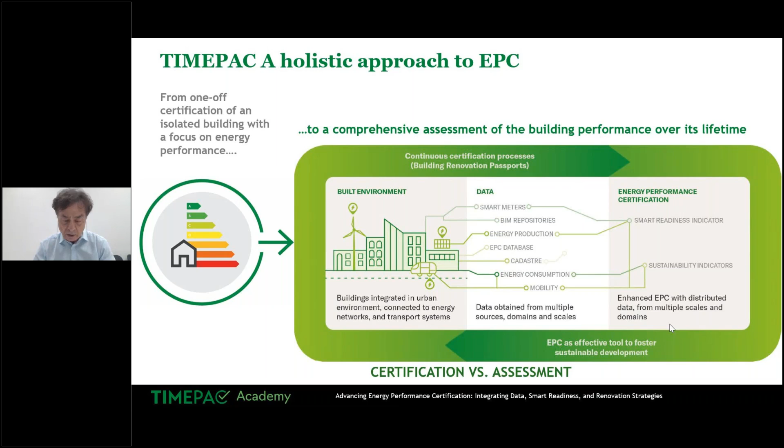For us, for TIMEPAC, the certification process is not just a one-time task. It's a continuous data management cycle that flows through 4 main stages: generating, storing, analyzing, and using certification data. This cycle is not static. It continues throughout the entire lifetime of the building, and this continuity allows us to assess and improve a building's performance over time.

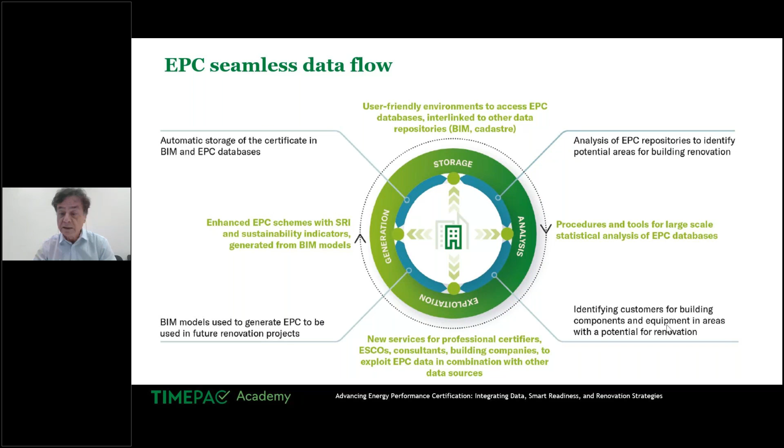However, each one of these stages brings its own challenges. In the generation phase, for example, we still have quality and reliability issues, which the recent EPBD is trying to address. In the storage phase, not all European regions and countries have comprehensive EPC databases. And even when these databases exist, turning this data into targeted recommendations is still difficult. Finally, analyzing this data and exploiting the knowledge to create services for improving the building stock is essential, but there are still questions about which actors and which services can be provided from the analysis of these EPC databases.

Data integration is therefore a key issue in the latest EPBD. For example, the EPBD highlights the importance of connecting national databases to EPC databases and also to the European Building Stock Observatory. EPC databases can also be related to renovation passports to track the renovation stages over time. To implement all of this connectivity between all of these components presents both technical and also local implementation challenges, which will need to be addressed in the coming years.

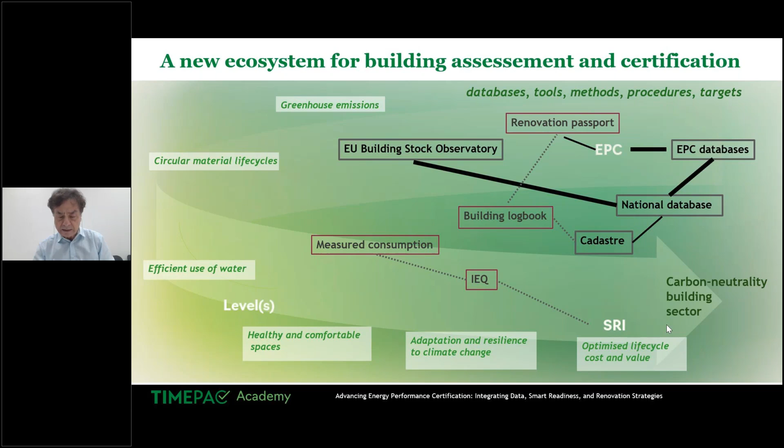Moreover, after the latest revision of the EPBD, EPCs have become part of a broader ecosystem, as we can see here in this diagram, which includes the Smart Readiness Indicator and also the levels framework. The integration of EPC with these certification schemes is also a challenge for the future development of building certification.

In the first year of TIMEPAC, we analyzed certification methods across 6 partner countries. Following this initial study, we started to envision potential scenarios to enhance current certification processes. Our focus was not on creating new tools, but on exploring diverse scenarios to inspire ideas and collect insights.

In particular, we consider these 5 scenarios: the integration of BIM with EPCs, this is the first one. The second one, EPCs enhanced with operational data. The third one, building renovation passport integration with EPC databases. Smart readiness and sustainability integration with EPC, and quality control of EPC databases for large-scale renovation.

These 5 transversal deployment scenarios were conducted simultaneously across the 6 countries, allowing us to consider building certification at the European level. After developing these scenarios, we validated our findings through workshops with stakeholders to ensure that our proposals were aligned with real-world needs. And finally, we concentrated on knowledge transfer through training activities, which is a key component of the TIMEPAC project.

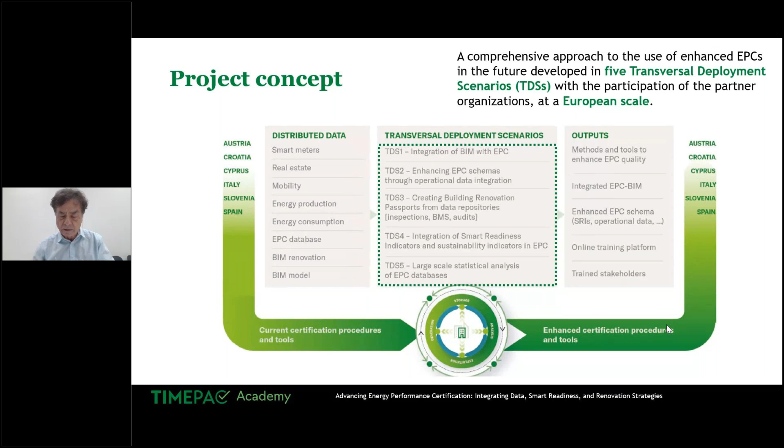Through the TIMEPAC Academy, we share these insights with professionals, building skills and fostering a deeper understanding of innovative certification approaches. I will provide now a brief overview of the key insights from each of the 5 scenarios, and a more detailed explanation will follow later in the next sections of this webinar.

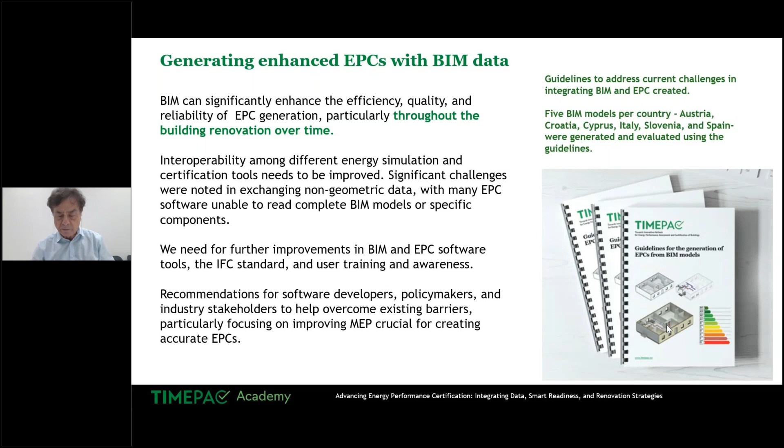The first one, integration of BIM with EPCs. In this scenario, we explore the integration of BIM with EPCs to enhance data certification. We created for this purpose 30 BIM models across the 6 countries and applied existing certification tools, identified the gaps, and developed guidelines.

The second scenario, enhance EPCs with operational data. Here we focus on adding real-time operational data to EPCs to improve their accuracy. New indicators for energy efficiency, for indoor environmental quality, and for building performance impact were introduced.

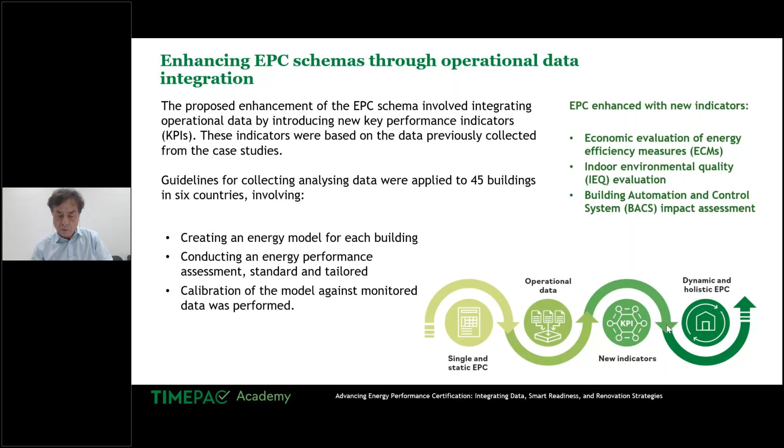In the third scenario, building renovation passport integration with EPCs, we examine how to incorporate the renovation passport into certification databases, creating a dynamic record of building improvements over time.

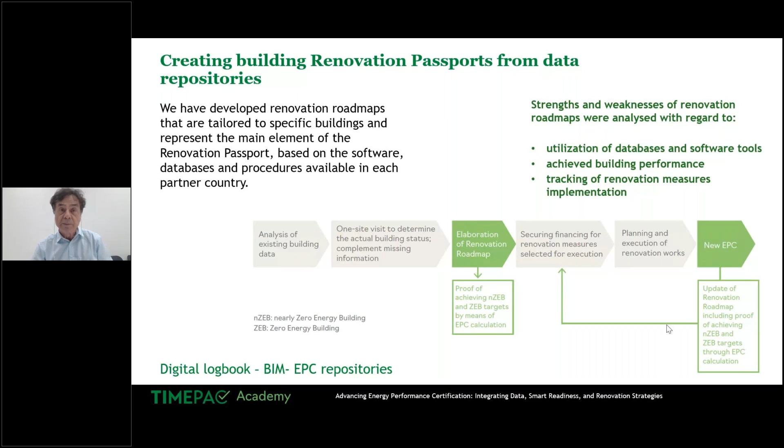For smart readiness and sustainability integration with EPC, we participated in pilot tests for the SRI, aligning EPCs with SRI metrics. And we created the TIMEPAC Code of Conduct for smart readiness and sustainability ratings, which is available on our website.

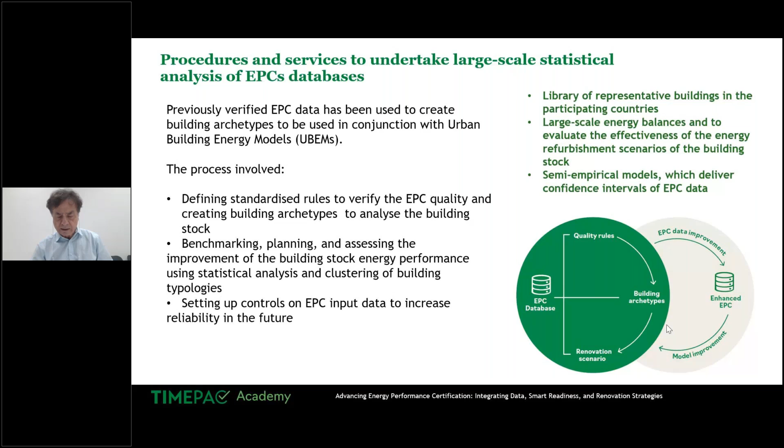And finally, for the procedures and services to undertake large-scale statistical analysis, we assess the quality of the EPC databases in the partner countries to identify inconsistencies. And in this scenario, we could develop archetypes for energy simulations, identifying renovation opportunities at the city level.

All of this work carried out in the last 3 years of the project is available on our website in different formats. First of all, the reports, the comprehensive report of the 5 scenarios, also in a summarized version in the fact sheets, and also the guidelines or recommendations coming from our work.

In the final year of the project, the TIMEPAC Academy played a key role in knowledge transfer. We conducted 6 online webinars, this is number 7 actually, as well as in-person training sessions in 6 countries, reaching over 900 participants. We believe that this strong demand underscores the need for ongoing education in building certification and renovation, even beyond the project's conclusion.

The TIMEPAC project ended a few days ago in October, but we believe that our work will provide valuable guidance as stakeholders need to adapt to the new regulatory requirements to help them ensure advancement in building certification and energy efficiency in the future.

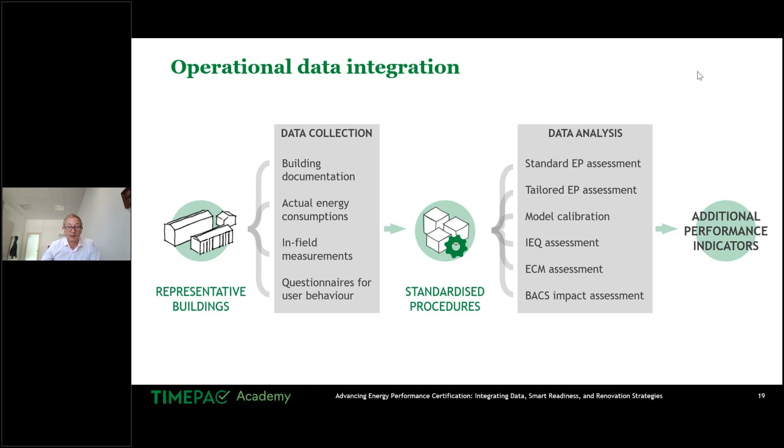The final aim was, of course, to explore the possibility of having additional performance indicators in the enhanced EPC.

The preliminary phase regarding data collection classifies the data to be collected according to the source. Data can be taken from building documentation, for example existing certificates, energy audit reports, etc.

Data can also be taken from in-field measurements and from questionnaires. According to the availability and the analysis to be performed, the data can also be classified as real data, reference data that apply so-called inference rules to determine the most probable data in case real data is missing, and sometimes conventional or standardized data are used.

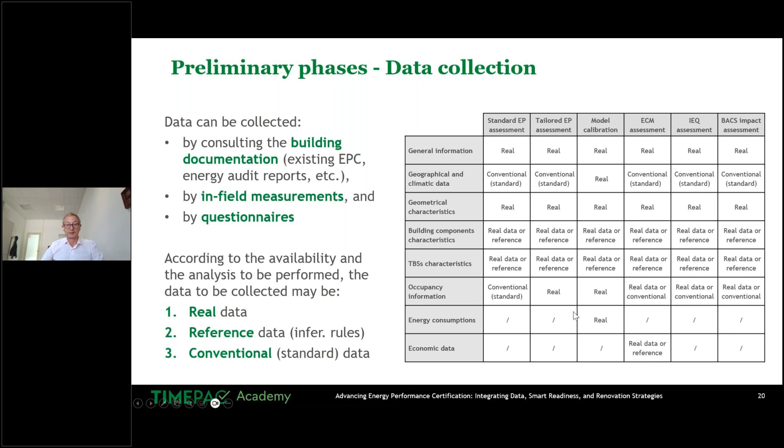Moving to the data analysis, most of the analyses we performed, described and specified in the guidelines, are based on well-established methods specified either in international standards or international guidelines. For example, regarding model calibration, the main reference was the ASHRAE Guideline 14, issued in 2023. For indoor environmental quality, energy conservation measure assessment, and BACS, European standards exist, so nothing was invented - most methods were those specified in international standards.

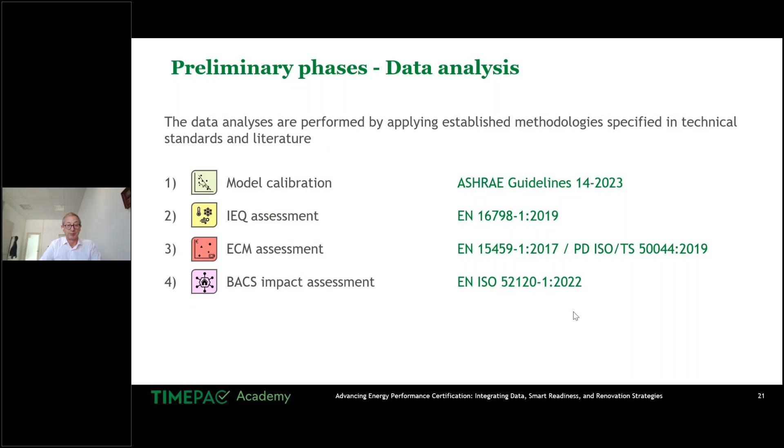Focusing now on model calibration, I'm going to describe the calibration as it was performed in our project. The model calibration includes some preliminary phases, which include the identification of the type and temporal discretization of monitored data against which to perform the model calibration.

Then the collection of all data relevant for the creation of the building energy model and for the calibration period. Unavailable data, if not mandatory, can also be derived from standards or other sources. All these data are used to create a base model, from which starts the definition of calibration scenarios and the following calibration phases.

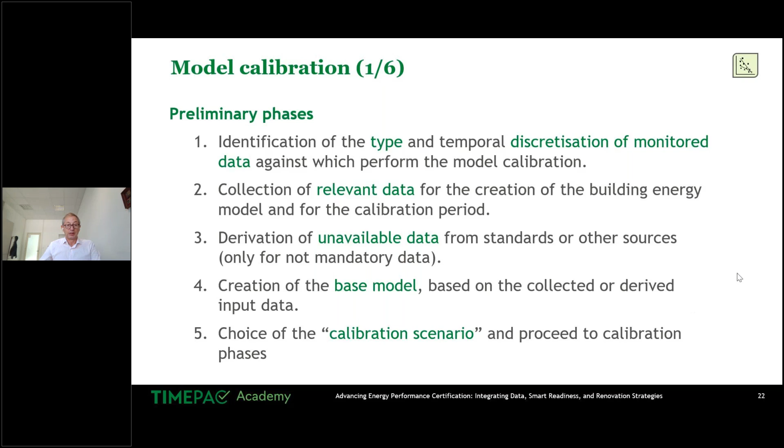In this slide you see some examples. In the table on the left side, you see different possible temporal discretizations for different kinds of data. For energy consumption, for example, it's possible to start from monthly average values, or weekly, or even hourly data, while for internal temperature, hourly values are typically used in the calibration process.

The two figures on the right side show two examples. On the top right, you see a representation of daily energy need for heating based on a weekly period, represented versus the average outdoor air temperature over the same period. The different colored dots represent simulated energy need and actual energy need respectively, and the straight lines are the so-called energy signature, which approximate the different dots.

So the calibration in this case consists of changing the input data of some parameters so as to fit the green line to the black dots, the black line. In the second example, on the bottom of the slide, you see representations of hourly temperatures, simulated temperature versus monitored temperature.

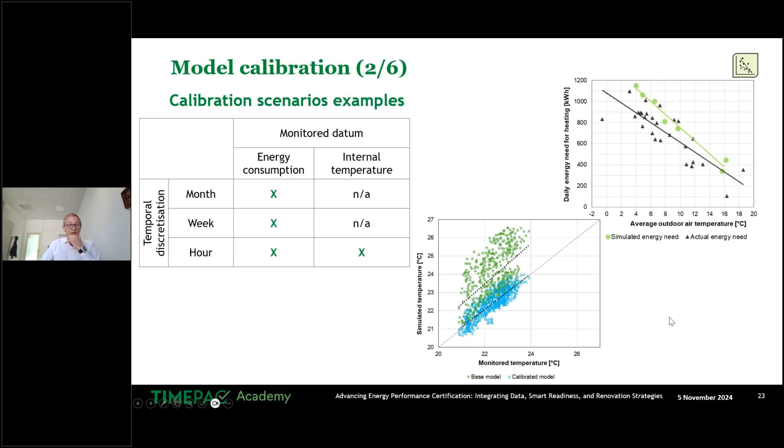In this case, the bisecting line represents the target. The green dots represent the simulated results before the calibration, and the blue ones represent the situations after the model has been calibrated. So moving to the calibration phases, 4 different phases can be identified.

The first one represents the execution of the simulation, the extraction of simulated energy consumptions in comparison with the monitored data. Then phase number 2 is the check of statistical indices compliance with the limit values. I will show you some examples of these kinds of statistical indices.

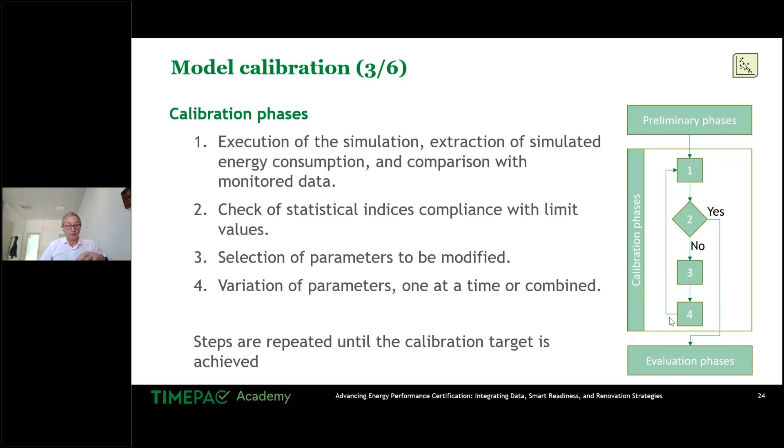Then number 3, selection of parameters to be modified. And number 4, variations of parameters that can be varied either one at a time or combined. The steps from 1 to 4 are repeated until the calibration target is finally achieved.

Regarding the calibration phases 1 and 2, they include the processing of simulated data to make this data comparable with monitoring periods. So the period should be the same.

As regards the statistical indices calculated, 2 main indices are applied according to the ASHRAE guidelines: one is the mean biased error, MBE, and the other is the coefficient of variation of the root mean square error.

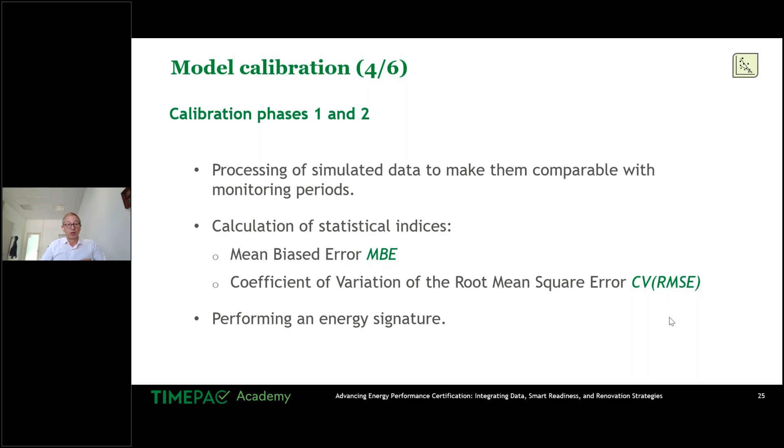Also, performing an energy signature, which is the straight line approximating the cloud of points, is useful to perform a calibration. Moving to the calibration phases 3 and 4, they typically aim at modifying the energy signature before the calibration to fit the data to the monitored data, basically by modifying the slope and shifting the energy signature, and acting on different kinds of data.

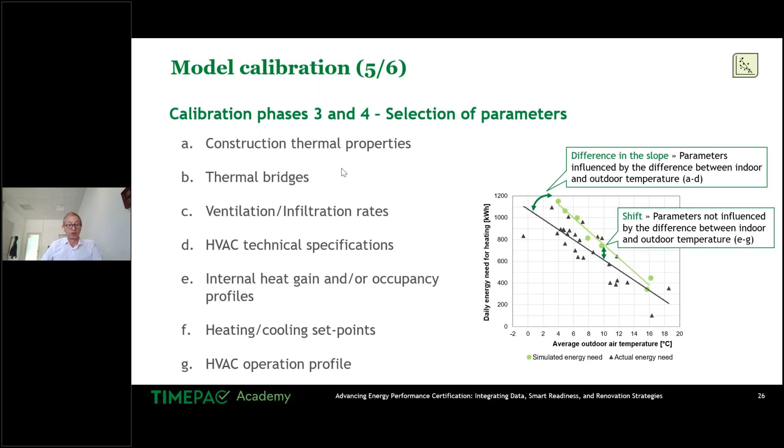The last phase of the calibration is the evaluation phase, in which it is possible either to represent the tailored energy performance, which is based on real occupation data, and the standard energy performance, which is based on standard user and climatic data.

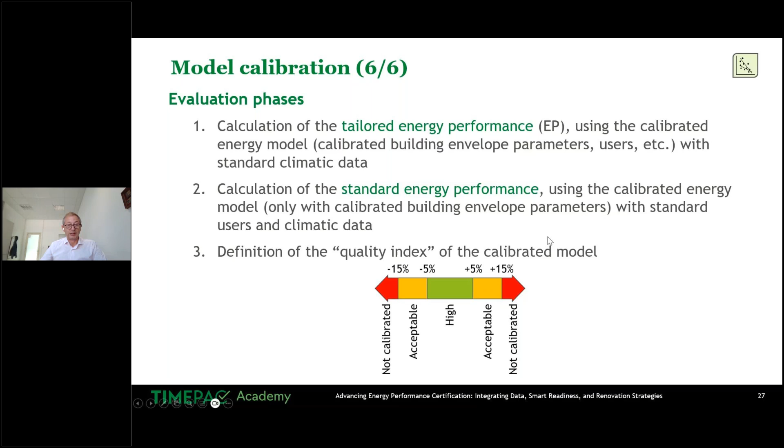At the end, it is also possible to define a kind of quality index using also different colors that represents the level of quality of the model after the calibration.

Moving very quickly to another example regarding the indoor environmental quality assessment, and more specifically the thermal comfort. This kind of analysis is also based on some preliminary phases, which includes, first of all, the identification of the indoor environmental quality category according to the building use.

The European standards consider 4 different quality categories according to user expectations, moving from high quality for occupants with special needs to low quality, which are referred to non-occupied spaces.

The most widespread category is the medium one, normal level of comfort, which is used for most new buildings.

Then the definition of a period of evaluation of the thermal comfort is based on 4 different possibilities. It is possible to play considering the winter season with the heating systems in operation, intermediate periods in free floating, so without any heating or cooling system, summer season with the cooling systems in operation, and summer season in free floating, which means without any cooling systems.

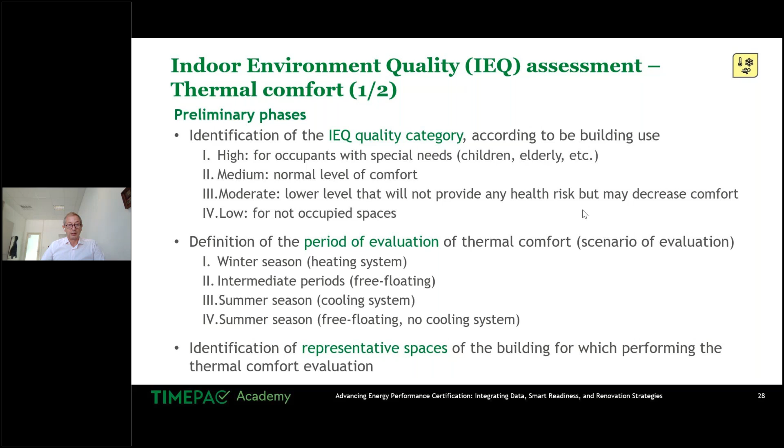I'm trying to, okay, next slide.

Moving to the evaluation phase, and this example refers to a free floating period, it consists of calculating the running mean outdoor temperature, from which it is possible to determine the thermal comfort operative temperature ranges. It is typically based on the so-called adaptive comfort theory.

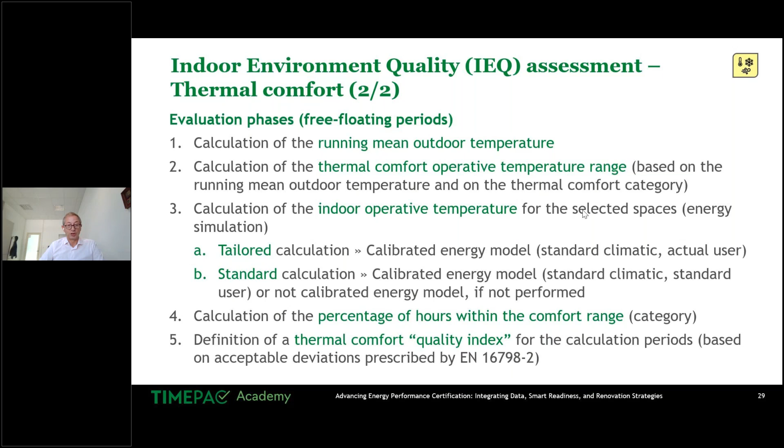Then the calculation of the indoor operative temperature can be performed in 2 different conditions, tailored and standard. Again, tailored refers to the real user and standard to a conventional standardized user. Finally, calculation of the percentage of hours within the comfort range, and the definition of a thermal comfort index based on the deviations of the temperature from the comfort range above defined.

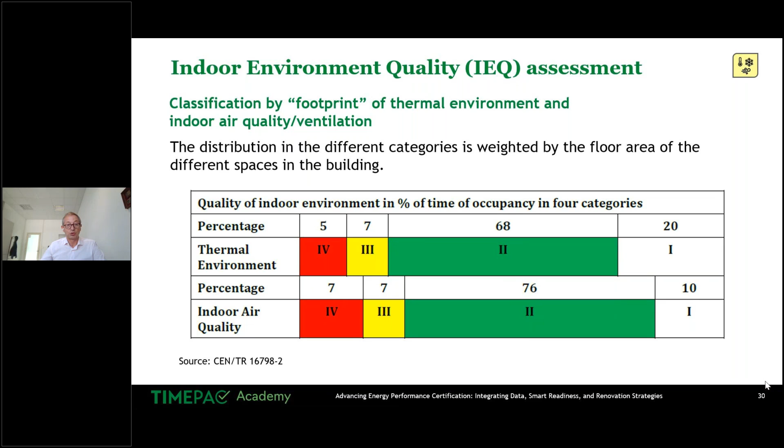The last two slides I'm going to present refer to the last two analyses performed. The economic evaluation, which is based on international standards, requires the definition and calculations of maintenance cost, the definitions of energy efficiency measure scenarios, determinations of initial costs of the building, investment costs, and calculations of annual costs.

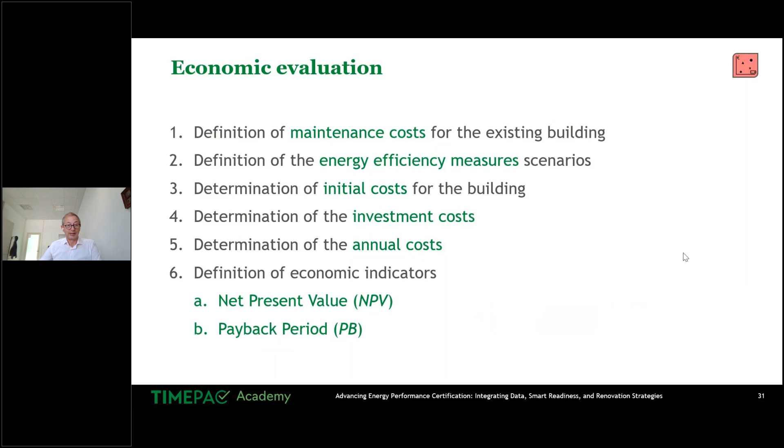At the end, the two economic indicators explored and calculated in our project were the net present value and the payback period, and they allow us to compare different possible packages of measures and to analyze the cost effectiveness and affordability of these different interventions.

My last slide is focused on the assessment of BACs. In this case, the international standards define four different classes, ranging from class D, which corresponds to a non-energy efficient BAC, to class A, which corresponds to a high energy efficiency BAC, and the TBM, which stands for Technical Building Management Functions. It was explored how to determine the BAC efficiency both for the whole building and also split by different services, meaning heating, cooling, domestic hot water, and so on.

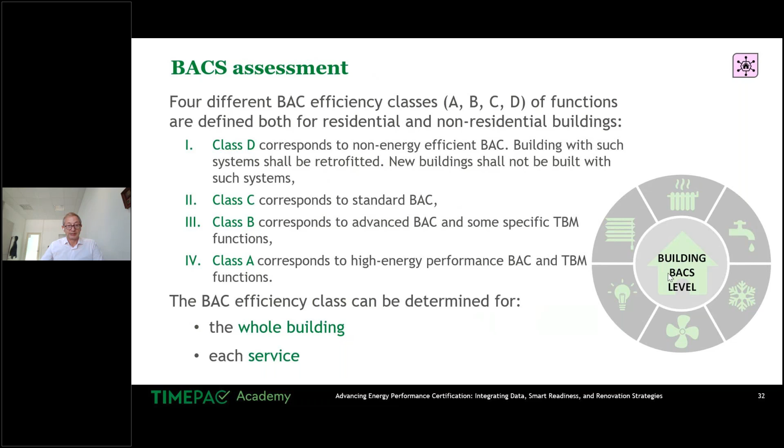This is the last slide, and thank you very much for your attention. It's my pleasure to give the floor to the next speaker. The floor is yours, thank you very much.

Thank you very much, Vincenzo. I'm really glad that I have the pleasure to participate in this Build Up webinar. I'm going to tell you more about evaluating smart readiness and energy efficiency in buildings.

Let's start with what we are doing, and do we really know what we are doing. At the beginning, when we were analyzing energy performance of buildings, there was a lack of data. Energy auditing was the first and the logical step, and in this context it was more or less clear, because the goal was to identify opportunities for reducing energy consumption and related costs.

From the point of view of the end user and from his perspective, there was a need for a robust instrument for reliable verification of energy savings and active support to building operators. All that was well connected through the energy performance certificate, which enabled better informed final users, better informed building users, and all that led us to comprehensive renovations implemented throughout the EU.

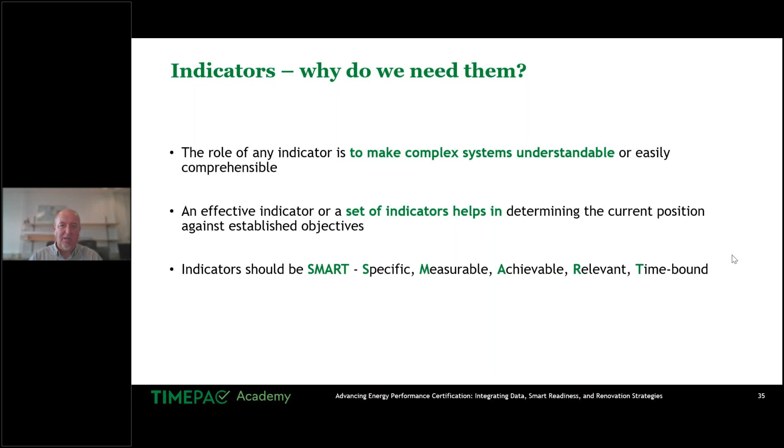Now we move to the smart readiness indicator and its purpose. Smart readiness, as an electrical engineer, I like a lot, because it brings us to the evaluation of smart ready services, categorized in nine technical domains, from heating, cooling, domestic hot water, ventilation, lighting, to monitoring and control. The performance of each service is assessed against seven desired impacts of smart buildings: energy efficiency, maintenance and fault prediction, comfort, convenience, health, well-being, energy flexibility and storage, and information to occupants. All these things help us understand the level of smartness in the building.

In practice, SRI is a very comprehensive indicator, considering a wide range of factors and providing a holistic picture of a building's smart readiness. The key part, and the most important one, is data collection.

Accurate data is needed for a wide range of variables, and we get that data from site visits, from other reports, energy performance certification, energy auditing, and interviews with the owner. That motivated us at the TIMEPAC consortium to create a flow for the data collection process and to identify the limitations, once again concentrating on available EU standards. Many of you could be familiar with this flow of activities, because they are connected with the flow of activities proposed in European standard 16247, which deals with energy auditing.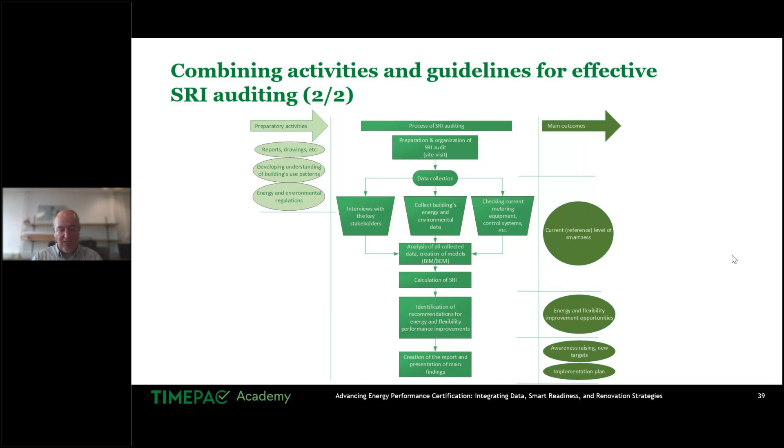Of course, the key question is how to understand the SRI. If you've been dealing with the SRI, you probably noticed that when you do the SRI calculation for existing buildings, they achieve very low values. Owners, users, and customers are dissatisfied. From our experience during the TIMEPAC project, we realized it's very hard to sell something when you get very, very low SRI values.

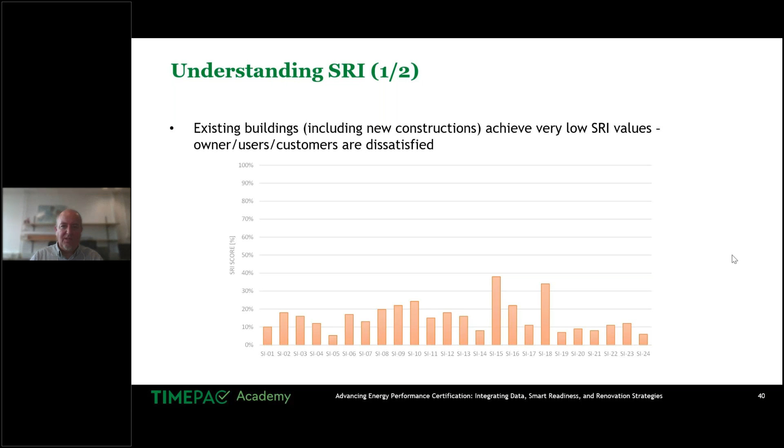This motivated us to propose another indicator, which we call the Smart Performance Coefficient, which compares the actual SRI value with a benchmark value. In this way, buildings that are performing well are also awarded with higher values of the Smart Performance Coefficient.

This is also how we see future comparison of different buildings, because when comparing the SRI performance of an elementary school, we don't want to compare it with a commercial building or a building from the retail sector. We want to compare it with an elementary school from another region or city. But we are fully aware that to make this fully operational, the database of evaluated buildings for which SRI is calculated has to be populated, and when we have a higher number of SRI values, we will be able to do this kind of comparison.

Also, on extraction of energy and flexibility measures, I'll give you a few practical pieces of advice. Always calculate the load factor and create a load duration diagram. The load factor will help you get an impression of the ratio between average and maximum load. This gives you information about the potential to implement flexibility measures.

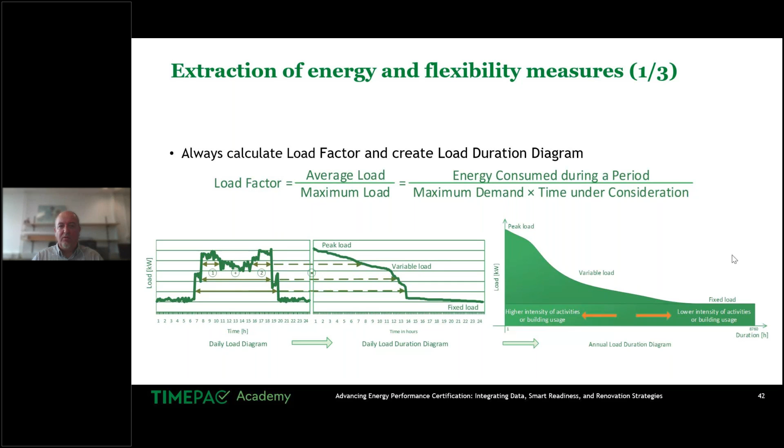When you calculate the load duration diagram, you will see what amount of your load is actually the peak one, what is variable, and you will also be able to identify devices that can be transferred or controlled.

Also, you always, when you do the SRI assessment, you always need to provide the comments, because they are necessary for the extraction of energy efficiency measures. If you just take the tools and fill it with your grades without providing comments, that is not useful, not for the final user, not for future exploitation.

For instance, for the electricity utilities that want to explore the flexibility in certain areas, the comments are also necessary for properly understanding the SRI rating. And also if the SRI rating is commented, then that can be a proper tool for aligning the common interest between ESCOs and building owners.

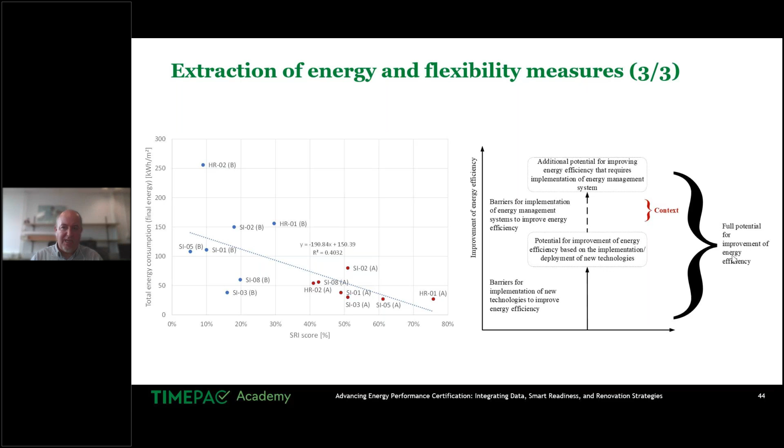Also, in this context, when you do it in a proper way, you can see on the left side of this slide an example of different buildings from Croatia and Slovenia, that actually improving smartness means also improving energy efficiency of buildings. Improving smartness means that you also tackle the context of energy use if you provide comments, and this is extremely important if you want to provide a reliable assessment of energy consumption in buildings.

As a conclusion, I would like to say that calculation of the SRI can definitely be the basis for the identification of performance improvement opportunities. Don't forget, combine the activities, combine the SRI assessment with energy auditing and energy performance calculation.

Don't be too strong on SRI, because it's in its early stage. Actually, a testing phase across the EU is going on, so we are learning by doing. And I think that if we continue honest cooperation between different member states, we can have a very useful tool.

I also advise you to visit our website, check our proposal of the TIMEPAC Code of Conduct for Smart Readiness and Sustainability Rating, and don't forget you need to explain the SRI score to the final user. The implementation approach should always be teamwork, honest communication with the key stakeholders, and your focus must always be on effective measures and follow-up of the measures and indicators that should be calculated.

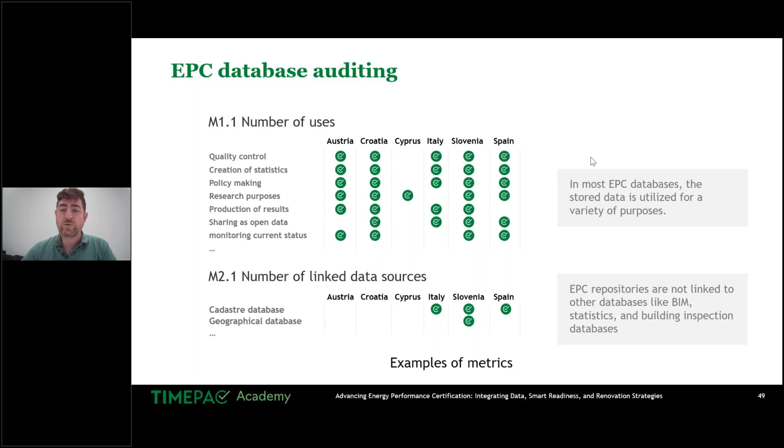Then another metric is the simplified database complexity index, and this metric tells us if the database is complex or not. When I say database, I mean the data model that is behind the schema. And most of the databases are not complex.

We have the case of Croatia, which is a bit complex. If a database is complex, it means that when they have to modify it according to the new EPBD requirements, they will need more resources. We also looked at the metric store for monitoring data and renovation passport data, to see if there are databases already storing this data required by the EPBD. In our sample, only one database, Austria, was storing this kind of data.

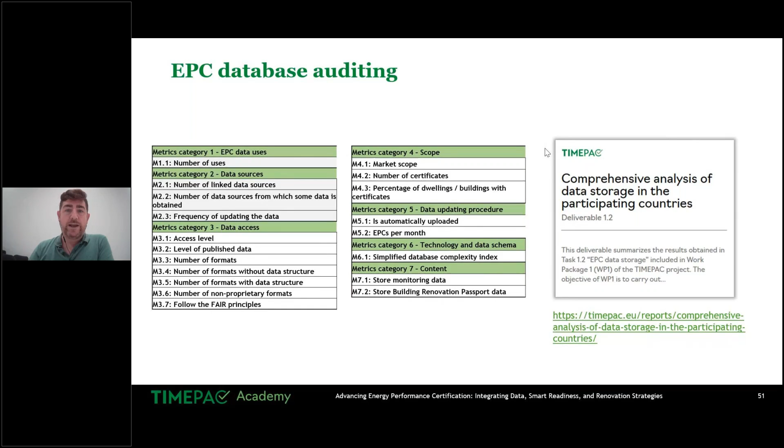Here you can see the list of the different metrics that we have used, and all of this report can be found in the deliverable: comprehensive analysis of data storage in the participating countries. You can go to the TIMEPAC website and find this report and all these conclusions and metrics.

Once we know how the EPC databases are with regard to the new requirements of the EPBD, the second question we ask ourselves is the following: can using BIM for EPC generation improve the data quality? This question is relevant because, as you probably know, the EPC data we have stored is not 100% reliable, but we want to improve this status.

So our hypothesis is the following. Nowadays there are practitioners that generate the EPC manually. They go to the EPC generation tool, they input data about the model itself, the properties, but this can provoke mistakes, some errors, because it's a manual input. You have to go to the building, measure everything, do some scans, floor scans, and this provokes errors.

So our hypothesis is: if you generate a BIM model, a geometric 3D model of the building, also with the properties, the analytical model, and the mechanical, electrical, and plumbing model, if you put everything there in a BIM model, then with a semi-automated input you can generate the EPC, the certificate. And probably it will have better quality than if you do it the manual, traditional way.

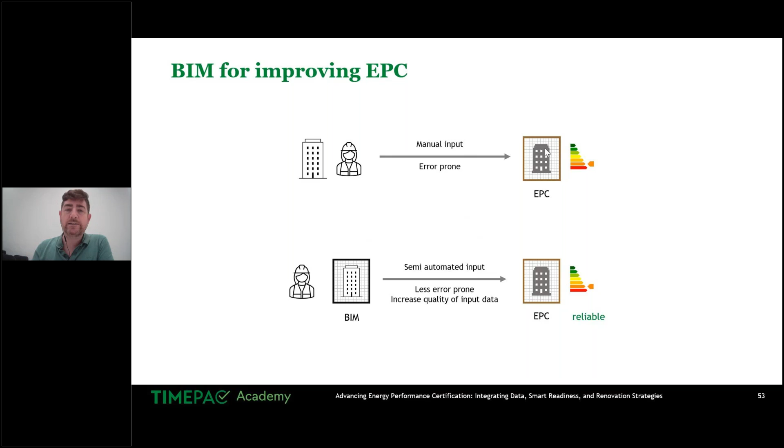So this is our hypothesis, and for doing that we thought we have to go through an open interoperability process, meaning using data model standards like IFC, that allow us to take a BIM model on the left side and fit it into different tools or processes we want to carry out: the EPC, the building renovation passport, or the digital building logbook. We need a way to centralize all of this data about the building, and one way to do that is using BIM and open interoperability.

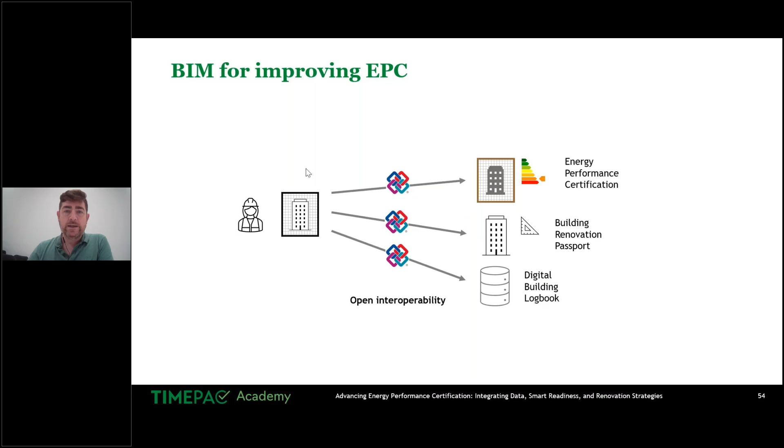Open interoperability is an effort, so we need resources to do that, to make BIM work with other tools. It's not cheap in terms of resources and time that we need to spend, and we ask ourselves if this effort is worth it.

The big picture is the following: you create the BIM today for a building. It will cost you time and money, of course, but this BIM model can be reused over time, when you want to renovate this building in 10, 15, or 20 years, according to the renovation passport that building should follow.

Also, when the digital building logbook is in place in a few years, I hope, this BIM model can be used in that logbook, used by the maintainer of the building, or for any financial instrument you may require. So it's worth it if you use this building model for different purposes. If you think, okay, BIM model only for the EPC, of course it doesn't make sense. But if you have the big picture, then it's the way to go.

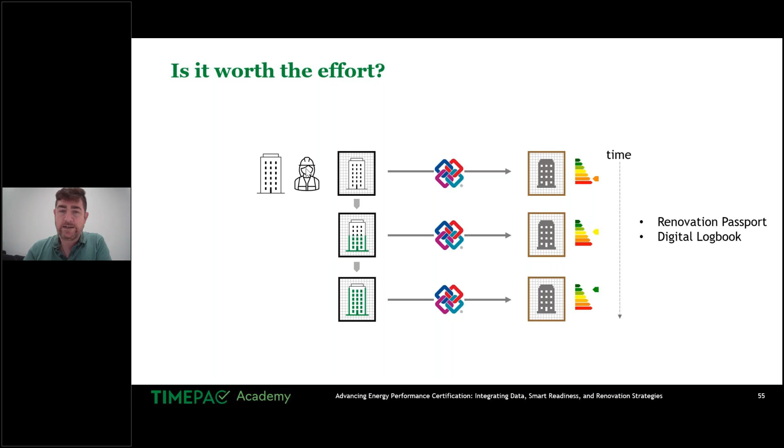So when we face this issue about open interoperability, at the end it's in the hands of the software developers to solve it. And we know that there are some issues, so it's not working 100%.

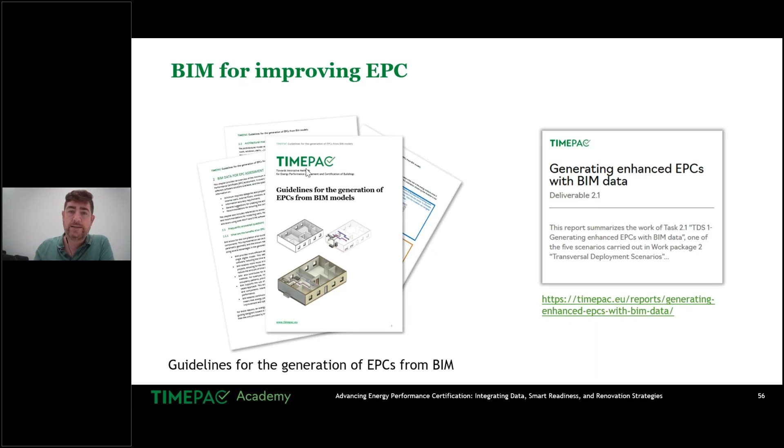To help practitioners move in that direction, we developed guidelines to generate an EPC from BIM data. All of this is reported in this deliverable, and the guidelines will soon also be published on the TIMEPAC website. These guidelines foresee two scenarios.

You have to develop the BIM model from scratch, so you don't have anything, or you have floor plans, for example, and you need to create the BIM model from this data. Or you already have a BIM model, and you want to validate it.

You want to ensure that this BIM model can be used to generate an EPC. So this is the process that we describe in the guidelines. You start modeling the BIM, the architectural model, the analytical model, and the MEP, the mechanical, electrical, and plumbing model.

Then we provide some tips and recommendations on how to export to IFC. Then when you have the file, we provide also the steps and the methodology to validate that IFC and to ensure that you have all the data needed for the EPC in that IFC file. And then we provide recommendations on how to import this IFC model into different tools.

The tools covered by the guidelines are the following. For the BIM authoring tools, we have Revit and CYPE. For the viewers, the IFC viewers for doing the manual checking, we have Solibri, USBIM Viewer, and BIMserver.center. And finally, for the EPC generation, we have covered CypeTherm here for Spain, also Edilclima EC700 for Italy, and ETU-Software that is used in Austria and I think in other countries.

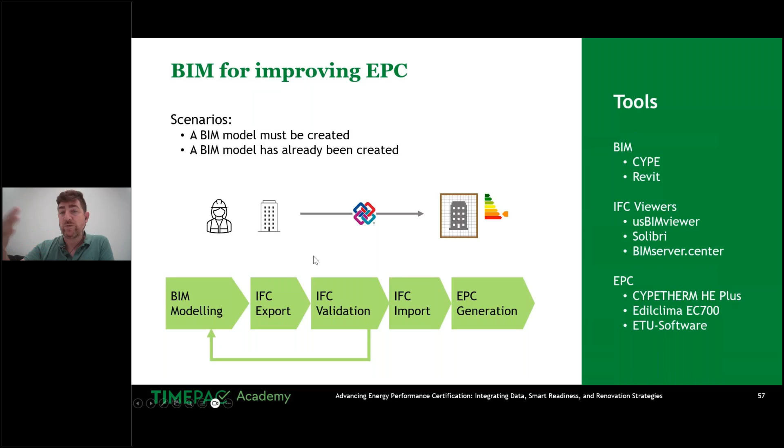So if we go deep into the guidelines, this has three chapters plus the annexes. The first chapter is about BIM data for EPC assessment, where we describe all the requirements and minimum elements that should be contained in the BIM model. Then we have a second chapter about information exchange for EPC assessment.

Here we describe how the import and export should be carried out through different tools. And then we have an in-depth study in which we describe not-so-common cases, like a curtain wall, how this curtain wall should be developed in a BIM model to generate an EPC. Also windows that are in between two levels, so these particular cases are described in this chapter.

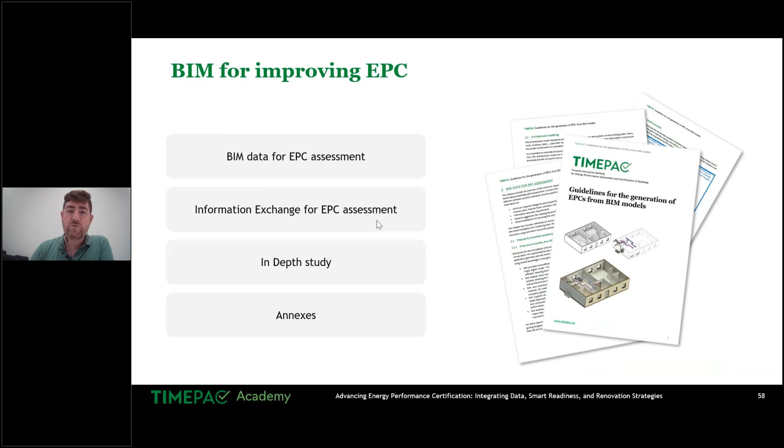And finally, in the annexes, we have described all the steps that you have to carry out in the different software. So it's a very comprehensive list and tables that you can find in the annexes.

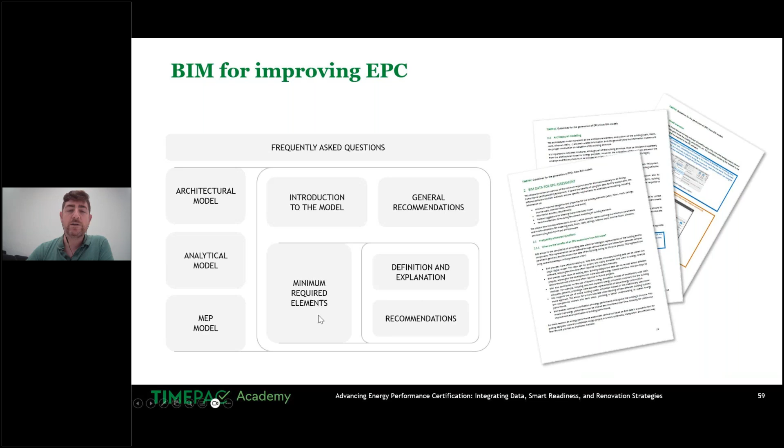So, for example, the BIM for improving EPC has this structure: the three models, architectural, analytical, and MEP model. And for each of them, we have the minimum required elements that should be modeled, general recommendations, and definitions and explanations. So this is the structure of the guidelines.

We have applied these guidelines to model 30 buildings in 6 countries. Some of them were created from scratch, and some were validated because we already had the BIM model created by a company, so we validated and redid some parts of them. We had residential buildings and tertiary buildings, and the input data was very good. We had various sources, from floor plans to EPCs to BIM models.

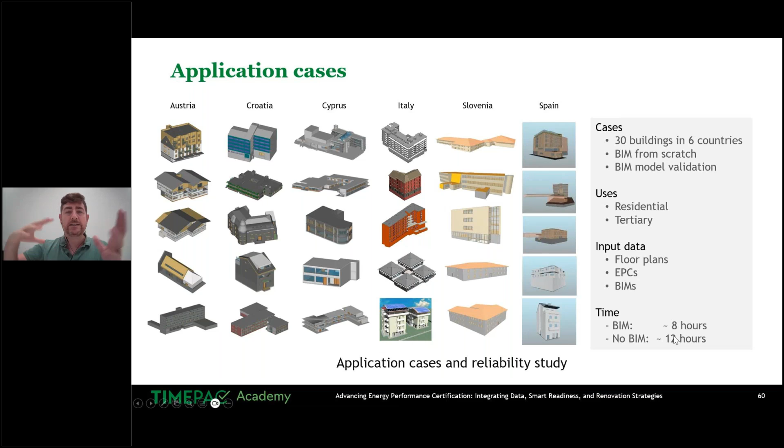The time we spent to generate a BIM model, if we don't have the BIM already, was more or less 12 hours, depending on the complexity or the size of the building. And for a BIM model that's already there, we spend 8 hours to validate it and redo some parts. So if we come back to the first hypothesis, if we use BIM to generate an EPC, is the input data reliable or not?

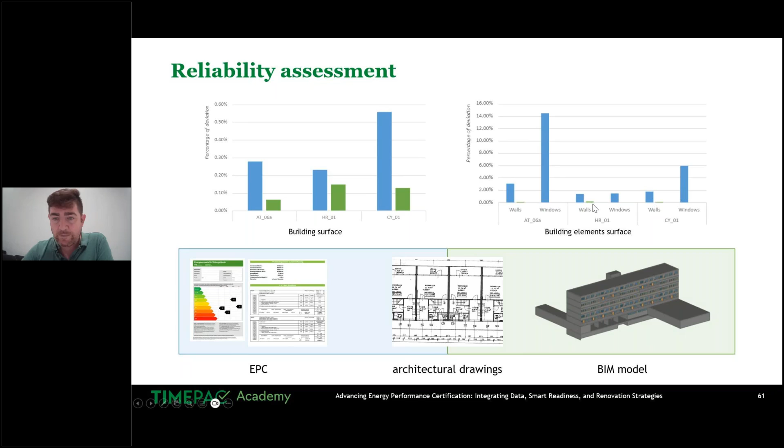But if we do the same calculation using the BIM model that we developed, we can see, which is the green bar—indeed we cannot see it—because the deviation is so small.

So through this reliability assessment, we can say that if we use BIM, the EPCs will have better input data and will be more reliable.

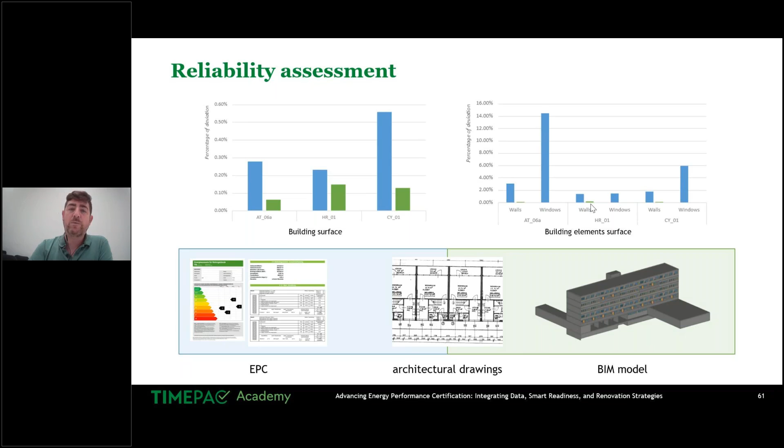So to conclude the takeaways, using BIM to generate EPC will improve the quality of the input data, as we can see in our examples.

The interoperability between tools is the key challenge. It's not solved yet. The guidelines are a step forward and can help reduce the burden of making the BIM authoring tools and the EPC generation tools interoperable, but still it's not solved.

And finally, as I said in the beginning, creating this EPC from a BIM model is not worth it, only for generating an EPC. We need the big picture.

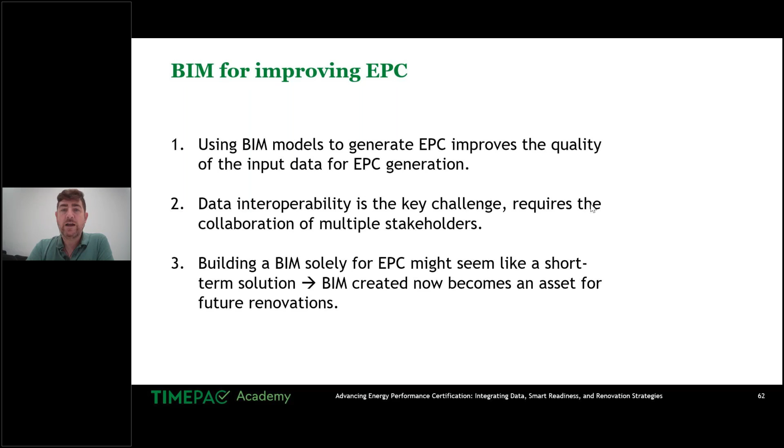We need to understand that this BIM model that is created today can become an asset for future renovations and for future uses of the building in the whole life cycle.

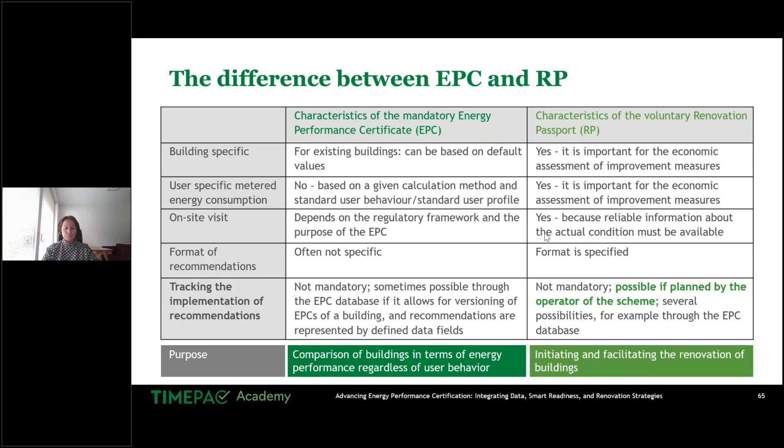So actually, the renovation passport responds to some of the challenges of the EPC, and in a way complements the EPC. For example, one of the challenges is that the EPC typically has a validity period of 10 years, which causes the problem that it's not clear if the publicized information relates to the actual status of the building.

In this regard, it is most important that the renovation passport allows for tracking the implementation of renovation measures, because this would be essential for accurately presenting the current condition of the building. And as a second aspect, it would be most important to make this information available to policymakers who are directing the transformation of the building stock.

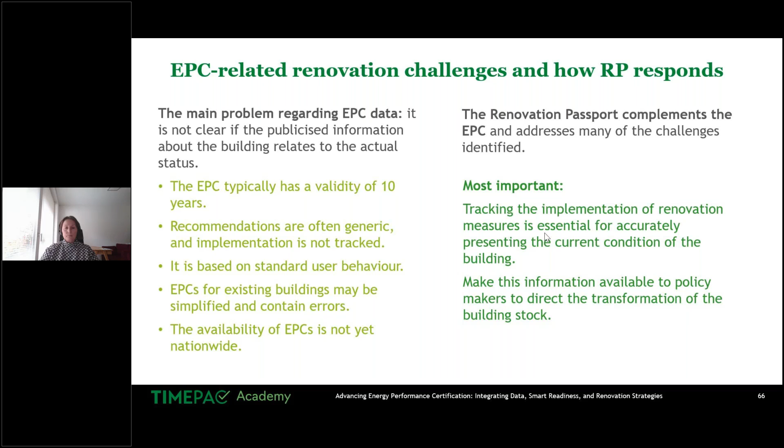Actually, the renovation passport is not new. Many EU member states have already implemented elements of it, for example as a consequence of transposing the amending directive 2018/844. So what is new according to EPBD recast?

Since 2024, the process is specified. A digital tool is requested that links with the EPC database and ideally with the building logbook. And the renovation roadmap that is part of the renovation passport should enable building owners to plan their renovation measures over time to transform existing buildings into zero emission buildings well before 2050.

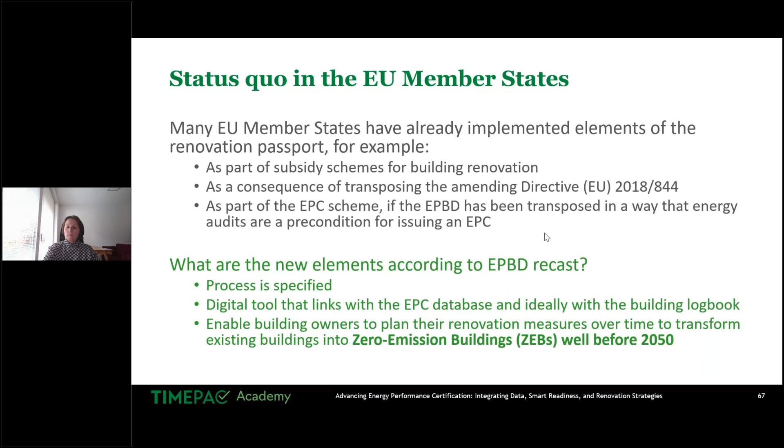So the EPBD recast contains a lot of specifications, and I'll just highlight a few of them. For example, the renovation passports must be affordable, and they can substitute the recommendations in the EPC.

Maybe another important point is it needs to include the steps to transform the building into a zero emission building, so packages of renovation measures in the correct sequence.

And three important elements: the digital tool, the link with the national EPC database, and the link of the renovation passport with the digital building logbook when established.

There is an Annex 8 that specifies in more detail how the description of packages of renovation measures has to look like. I will again just highlight that there is always the reference to the EPC. So we start with the current energy performance of the building, and after each implementation of a renovation step or renovation package, the energy performance that can be achieved by implementing those renovation measures also needs to be assessed. So we have that very close link with the EPC.

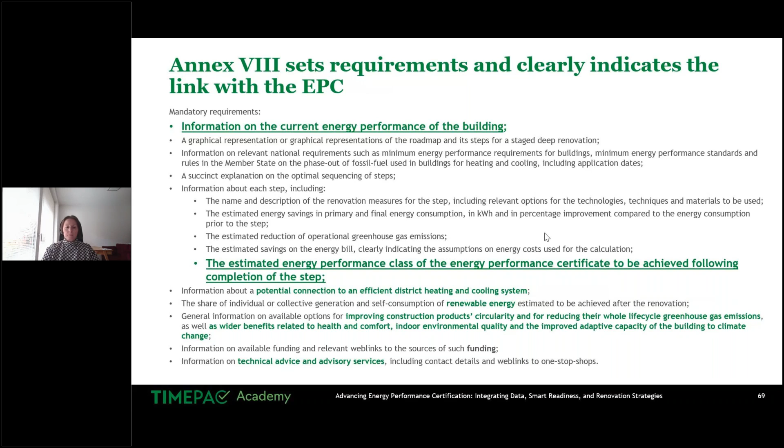So after having introduced the basics, I'd like to come to the second part of my presentation, namely how to set up a renovation passport scheme that is efficient and effective. And what do I mean by that?

Efficient in that context means we need to save time and money and avoid repeated data collection. That means we make use of data repositories. You remember one of the requests was that the renovation passport must be affordable.

The second aspect, what is effective in that context, it means that actually we aim for the implementation of renovation measures. So we need to track the implementation of renovation measures. We want to create an information base also for policy evaluation and adjustment of policy instruments. And in that context, it's also important to mention the link with the National Building Renovation Plan.

So in practice, there are 4 core elements to achieve this efficient and effective renovation passport scheme, and that's the digital tool, the EPC data, the EPC database, and the digital building logbook. The way how these core elements are organized and linked has an effect on the efficiency and effectiveness of the renovation passport scheme.

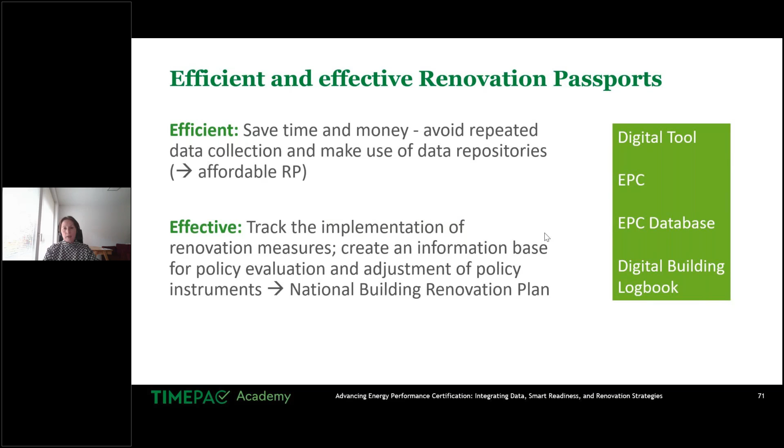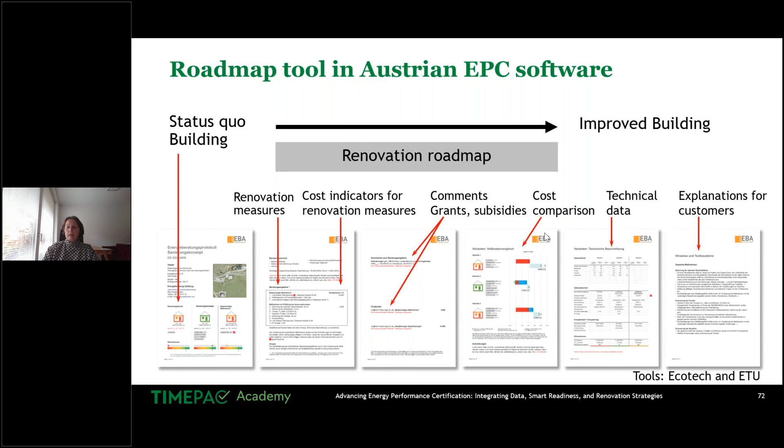In Austria, we have a digital tool that allows for EPC calculation and the renovation passport development, including the renovation roadmap. It is also possible to reuse data, and the tool links with the EPC database. That's the example of the province of Salzburg.

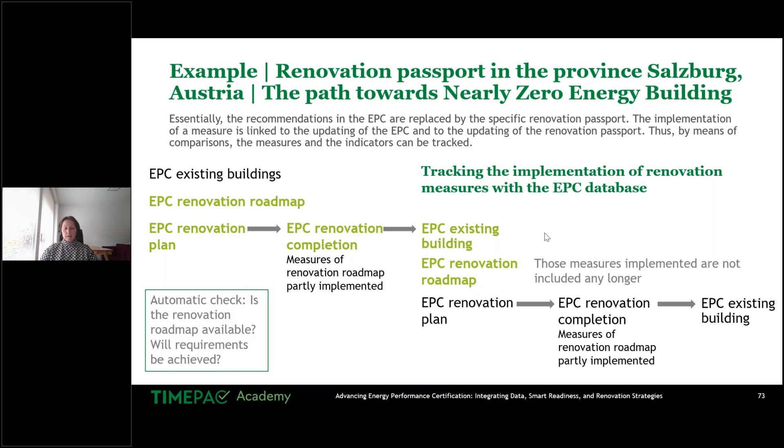How does it work? There is that interface with the EPC database where the EPC and the renovation roadmap is uploaded. And after the implementation of a package of renovation measures, the updated EPC and the updated renovation roadmap is uploaded again. And by comparison of the 2 versions, it's possible to track the evolution of the building in terms of energy performance improvements.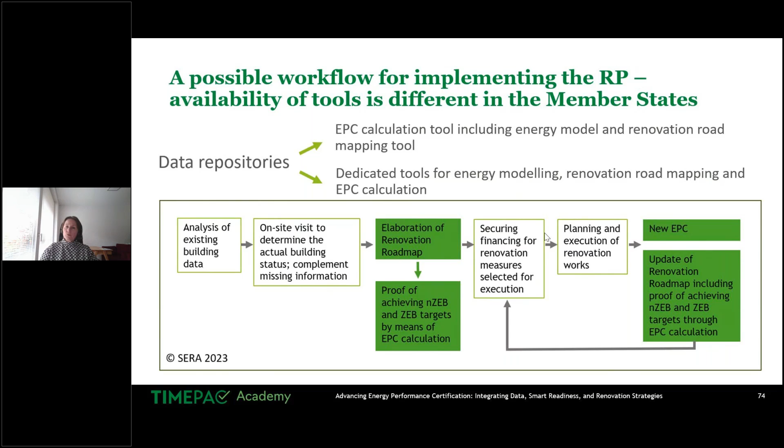Regarding the use of existing data, regarding the use of data repositories, it's worth mentioning that the situation is quite different in the member states, and it would probably work differently to set up effective schemes, because in TIMEPAC we identified that there are 2 approaches. We have EPC calculation tools which include the energy model and the renovation road mapping tool. And then there are member states where we have dedicated tools for energy modeling, renovation road mapping, and EPC calculation.

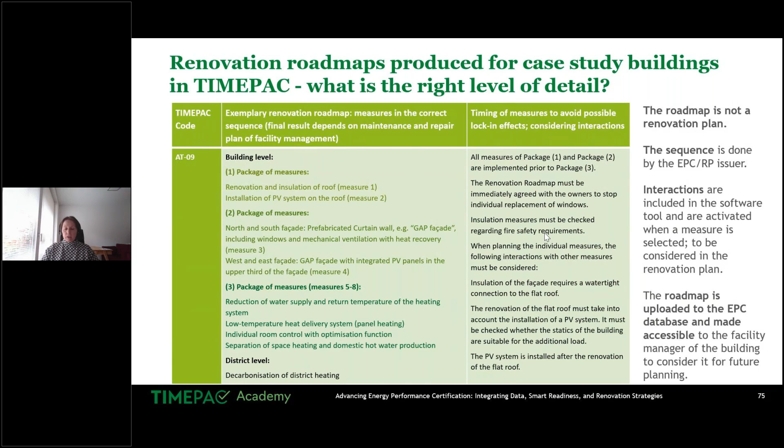Another important point is to consider at which level of detail we are with our renovation passport. It's very important that the renovation roadmap is not a renovation plan. This slide shows packages of renovation measures for a building we worked with in TIMEPAC. And actually, we specify the right sequence to avoid lock-in effects and make this information available to the building owner or the facility manager to consider that or take it into account in actual renovation planning.

With regard to data, it's essential, of course, the building logbook, so to reuse the data which are existing for a building. But with regard to achieving the zero emission target, it is also essential to have information about the site available. For example, the solar radiation potential, but also district heating connection or district cooling connections. And in that regard, the municipal information system comes in, and it will be necessary in future to also find ways how to connect the building related logbook and the municipal logbook.

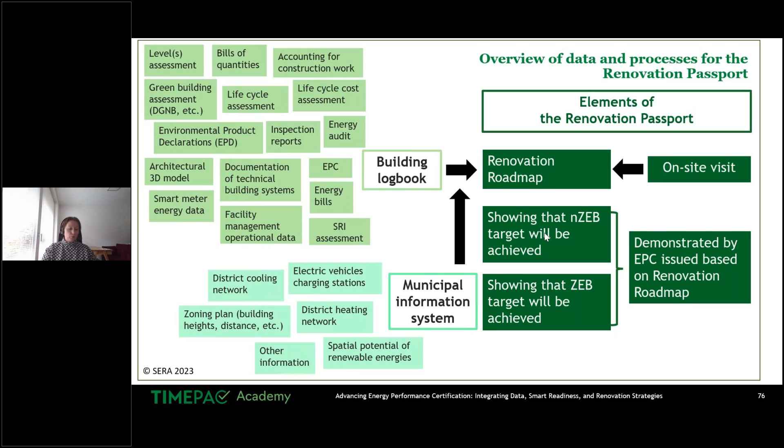This brings me to the end of my presentation. To conclude, when member states develop their renovation passport schemes, they should do it in a way that it enables the benefits of such a scheme. And in that regard, the tracking of the implementation of renovation measures is an essential element. The most important aspects to summarize are the EPC data and the database, the digital tool, and the digital building logbook. In our project, we came to the conclusion that a BIM-based approach would provide a one-stop solution for that.

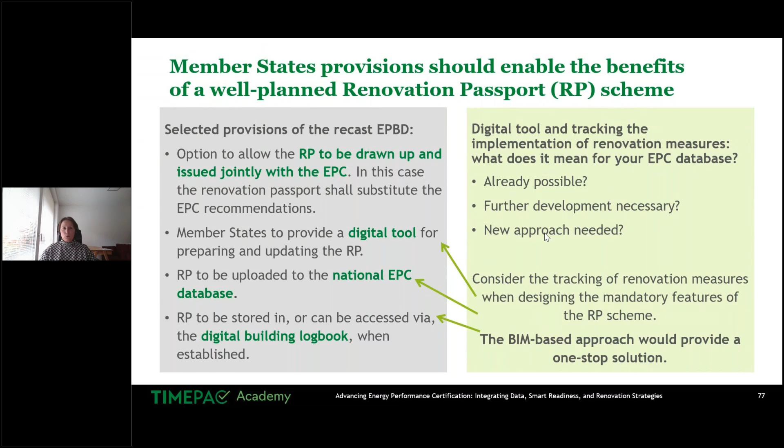With this concluding remark, I'm at the end of my presentation, and I hand over to the BUILD UP team.